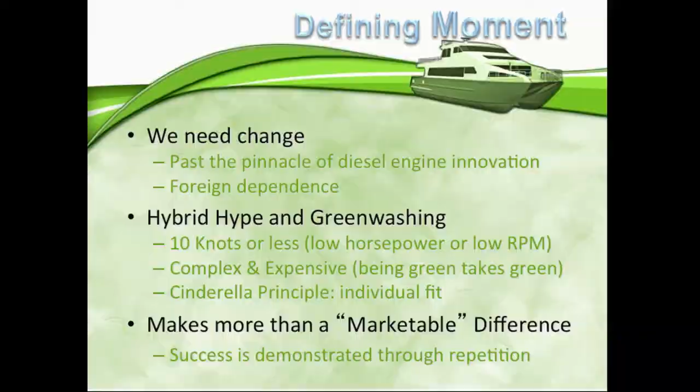And lastly, I want to talk about the marketable difference. If the hybrid technology was so great, we would see everyone doing it. We would certainly see the diesel technology engine manufacturers diving more into this hybrid technology and producing something that's mass marketable.

I don't want to naysay regulations or say anything bad against the EPA, but it seems to some extent that they may have stood in the way of innovation when it comes to green technology. The EPA had come out with a set of emissions criteria that the diesel engine manufacturers had to meet on a rolling tier basis. It started with Tier 1 and we're now at Tier 4. And the engine manufacturers, their R&D efforts were constantly devoted just to meeting the next tier. I think their nose was down and it was hard for them to see forward just because they needed to hit the deadline to keep their product moving out the door.

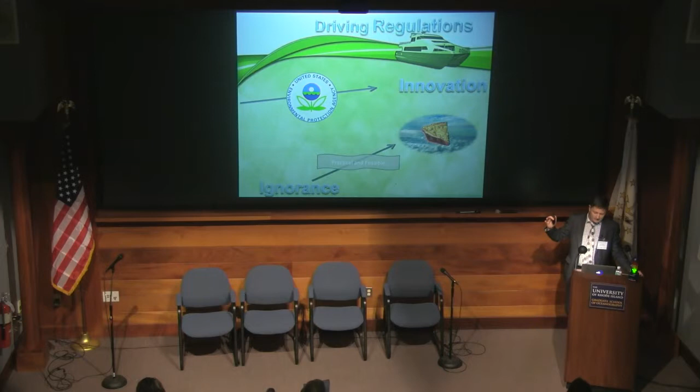It would have been much better, in my opinion, for the EPA to say, let's look to the future and say, by this date, engine manufacturers, we want you to be at this level of emissions. We don't care how you do it, just have at it. And their R&D teams could have taken a more proactive approach and really developed technology to be further along. We might have LNG that's more available throughout the low horsepower range as well. And so we are now at Tier 4, and it's the end of the regulations, and maybe now the R&D teams will be able to develop some more hybrid technology that's useful for the mass market.

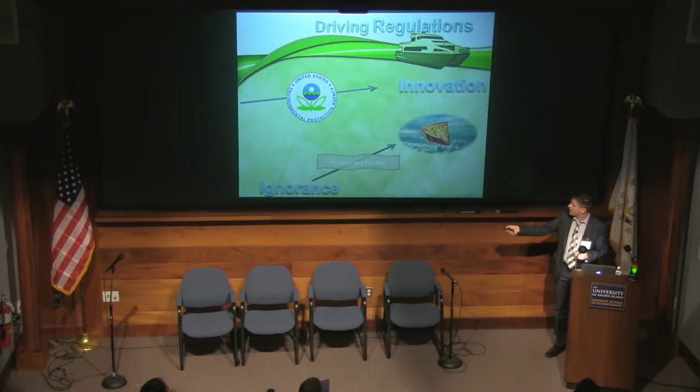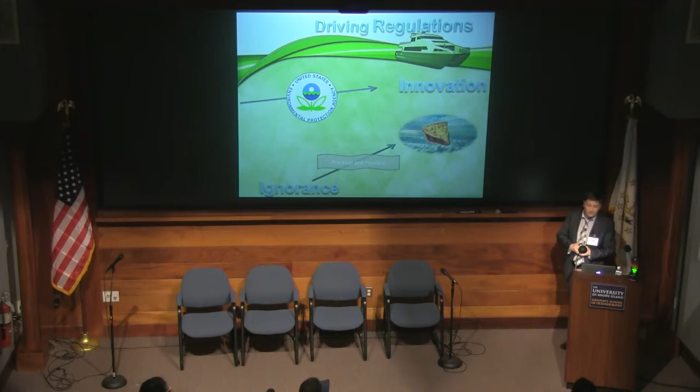And I like to say I like to live in this gray area here. I don't want to be in ignorance or pie in the sky when it comes to hybrid technology and regulations. I think we need to be somewhere right in the middle, somewhere where we can live and breathe and that is affordable and available.

So why do we want green technology on our boats? There's a variety of reasons. Typically, the bottom line, I just killed it, sorry. Typically, the bottom line is not one that we see people embracing green technology for. It is not a cost savings benefit right now. It's usually applying to appeasing various stakeholders.

When it comes to putting green technology on a boat, there are a variety of factors that need to be considered. What green technology is available, what infrastructure requirements are going to be required, be it fuel source or shore power requirements. What do the regulations say? How safe is it going to be? Am I still going to be able to accommodate my mission on board my research vessel? There's space and weight requirements that need to be evaluated. How much fuel am I going to burn? And what is the net savings am I going to experience with emissions? And all of this is a lot to balance.

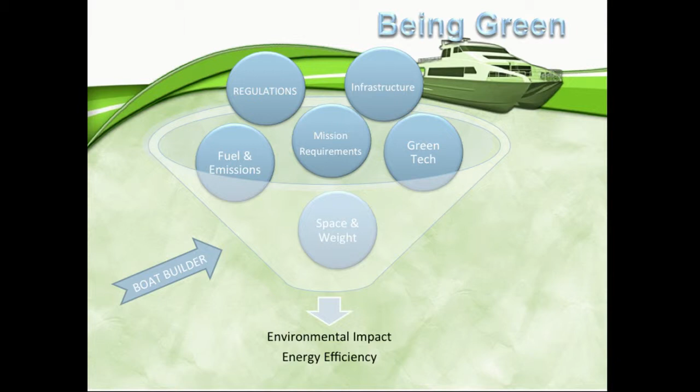It unfortunately ends up being the boat builder's responsibility to pull it all together. And it's a challenge. We'd like to blame the naval architects, but it's really the boat builders in the end who are left holding the bag to put it all together. And it's not easy to do.

So when it comes to considering all these variables, the first thing we want to talk about is regulations and safety. Right now, there's not a lot of regulations out there when it comes to boat building in terms of incorporating green or hybrid technology. Typically, all of the research vessels that we build, they're going to universities or to NOAA or even Army Corps of Engineers, and we'll still follow U.S. Coast Guard standards. It's not a requirement for them to be inspected, but it's good boat building practices. And we'll use the Subchapter T standard for those regulations.

And the thing without having a set guideline with these regulations is we as a boat builder or naval architect have to apply to the Coast Guard for consideration of installing this green technology on a case-by-case basis. Right now, the Coast Guard doesn't have any guidance as to how they're going to consider the installation of lithium-ion batteries. They're very concerned with potential fire hazards, weight issues, wiring runs, etc. Yet they put the onus on the naval architects and the boat builders to come up with a safe plan. And they will review it and approve it, but the onus is on us.

Same with LNG and hydrogen. Right now there's various applications out there that the Coast Guard is looking at, but no standards have been set to date.

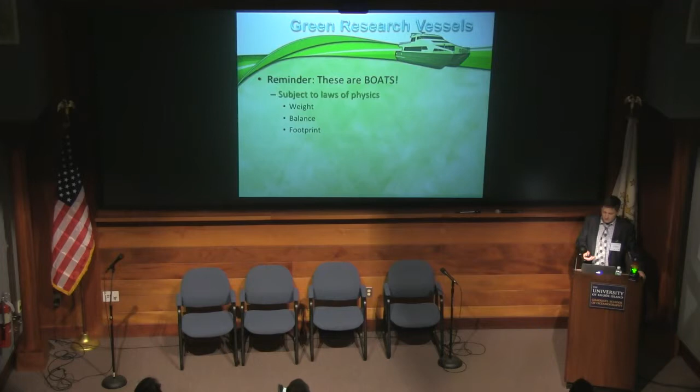I talked a little bit about the infrastructure requirements. We'll get into this a little bit more in my presentation in terms of the fuel, specifically LNG and hydrogen. Great potential for those fuels, but sourcing them and the infrastructure requirements are very high still. And same with shore power. If you want to be all electric, just bringing electricity to a dock may sound simple, but it presents a variety of challenges. Water and electricity are not friends.

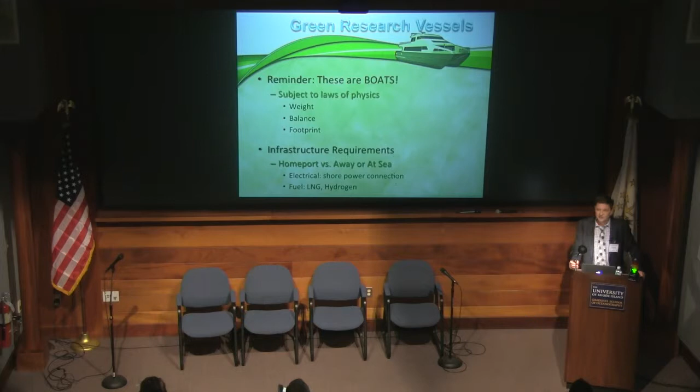Lastly, when it comes to installing hybrid technology, you really want to set specific goals as to what your target is that you want to meet. Be it reducing emissions, reducing fuel consumption, switching to a different fuel type. You can't do it all, and say that you have a completely 100% green vessel. There's going to be some trade-offs along the way. If you have to add additional systems on board, those systems are consuming energy, so your net gain in terms of being green is probably offset.

So I want to get into some of these available green technologies, talk about what is possible, what these eco-pioneers have done. Potentially these are still one-offs. We're seeing more and more of these applications being repeated, and I kind of use the rule of three. Once you see three of these installations, then this technology starts to trend, but most of these guys are still what I would call eco-pioneers.

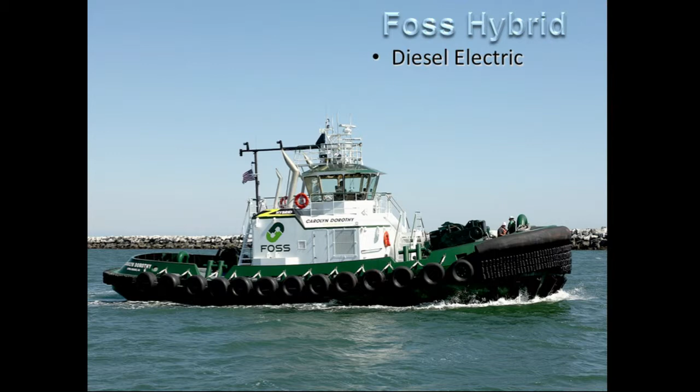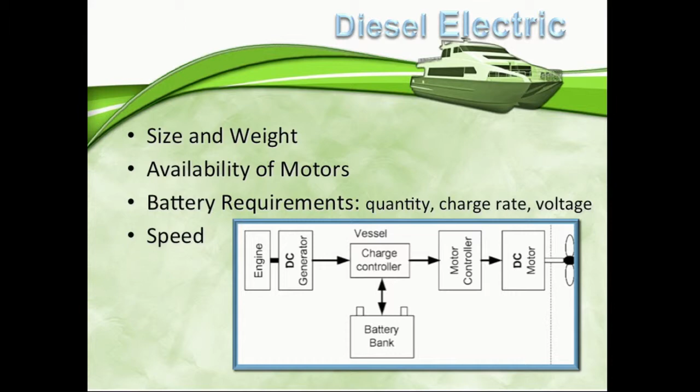So we've seen Foss come out with their hybrid system. I believe this has already been talked about, so I won't go into too much detail, but you're looking at a conventional diesel engine that's supplemented with an electric generator to help drive the propulsion system. A lot of battery requirements and integration, and integration is very complex. So you have a variety of manufacturers supplying things like the generator, the diesel engine, and the batteries. But then who's responsible for integrating it? You have all these different companies, and there ends up being a lot of finger pointing, and a lot of software and technology involved in pulling them all together. And so it ends up being a very expensive and very heavy system, and you can see it pretty much takes the size of a tugboat to put it all together.

And it doesn't always work. The Port of Los Angeles was subject to what I call peer pressure. They were making their pier green, and they said, well, if we are making our pier green, we need to make our tour boat green. And so they decided to put in a hybrid system in their tour boat. However, they could not get all of those components to work together, and they got so frustrated, they said, heck with it, we're selling the boat. And so I think it's been sold recently, or it might still be available on eBay if you're looking for a new hybrid boat.

LNG, great technology, low emissions potential. However, there's a variety of concerns when it comes to LNG. First of all, the tank size. You're going to have to be operating in an area where you can have frequent refueling capabilities available to you, or have very large tanks on board. Those tanks tend to be very heavy.

We've also seen a lot of reluctance, especially now with oil prices dropping. The focus on LNG has been slowed down, and so the engine manufacturers are not pushing that very much. And it's still a very high horsepower application. So for the masses, if you're talking about vessels that are 150 feet and smaller, LNG technology is really not a viable option today. There's no engines being made in that low horsepower range.

And then policy is still being developed with the Coast Guard. They are looking at it right now, and they have formed a liquefied gas carrier national center of expertise. And so they realize that this is a forthcoming technology, and they do want to be a part of it.

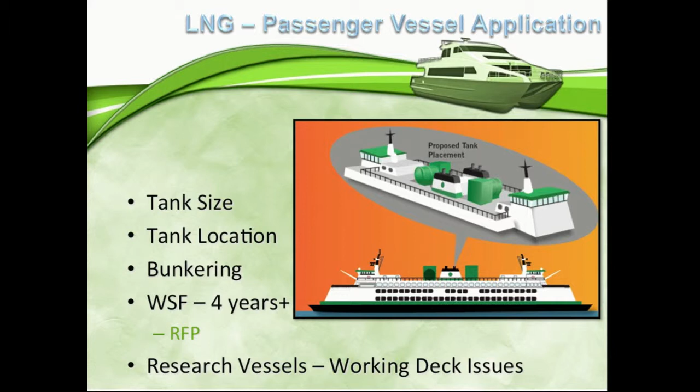Washington State Ferries has had a slow go at it. They've been working on getting their ferries repowered with LNG technology and issued an RFP, but they haven't moved on it yet. So we're still waiting to see what they're going to do and where those tanks are going to ultimately be located, which is up top. And that makes for a boat very unstable when you have weight up top. Also, the bunkering - Harvey Gulf had to actually put in their own LNG bunkering facility to accommodate their requirements.

Hydrogen fuel cell technology, great technology. In concept, hasn't been proven yet. Hornblower gave it a go. They worked with the Coast Guard for several years trying to implement it in New York, and ultimately it's on hold, is what I've been told.

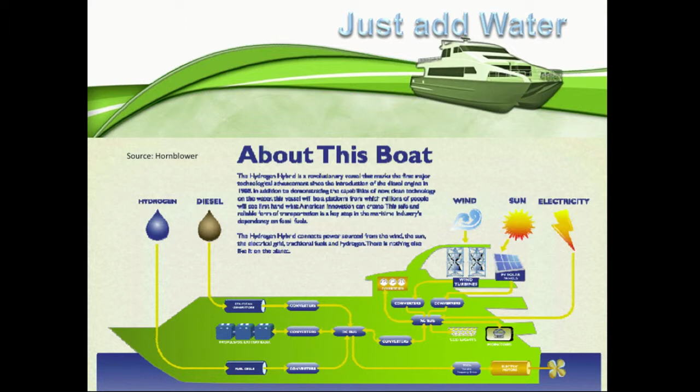It was a challenge. They were actually trying to do a variety of things with wind and solar and hydrogen. And as it was talked about yesterday, hopefully Red and White Fleet with their cooperation or partnership with MARAD and Sandia will be able to bring hydrogen fuel cell technology to a passenger vessel application. So this was one we're watching very closely.

Solar technology still needs to be developed further to be useful for general marine applications. Where do you put all those solar panels? You need a lot of them. How much energy are they going to be able to harness for you to use, and how fast will the vessel be able to go? A lot with the solar sailor application, they're trying to do wind and solar. It's a lot of components, and they can do maybe one thing efficiently, but it's very difficult to do all of these things efficiently.

Here's one that I like. I've never seen this in operation, but it intrigues me. I guess if you live in a windy place, using some kite power might be an interesting form of hybrid technology. Here's one that's a little bit more scalable.

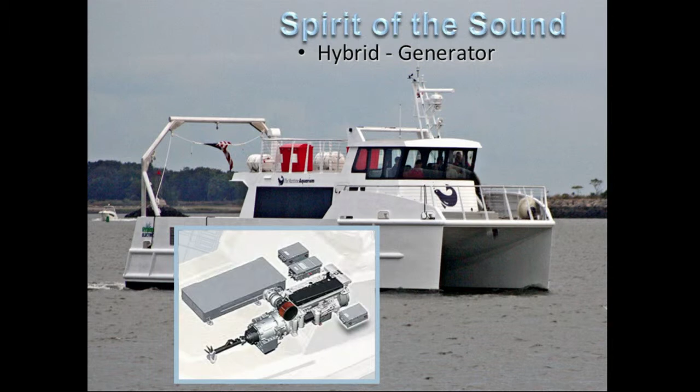And of course, yesterday, I believe it was talked about in detail, so I won't go over it here, but the Spirit of the Sound is great, using the generator hybrid technology. I think this could be a viable option. I'm still listing them in my Eco Pioneer category, but as they build more vessels with this technology, we'll move them over to the trending side.

So what is realistic? Let's talk about some applications for green and hybrid technology, mainly just green technology that I think are viable right now today. Keep in mind that there are many shades of green.

So this first one that I like is a fairly new technology, and this is using a hybrid transmission. This transmission allows you to use smaller sized engines that are supplemented with electric motors. So we can use the smaller sized engines that will burn less fuel and maintain our speed or range with these electric motor inputs. So this particular gearbox has provisions for two electric motors that can complement the diesel engine.

So this is still diesel engine technology. The beauty of this is if you do have a battery source on board, you can actually take your main engines offline and then just drive the transmission directly with the one or two electric inputs. So it's a good way to go.

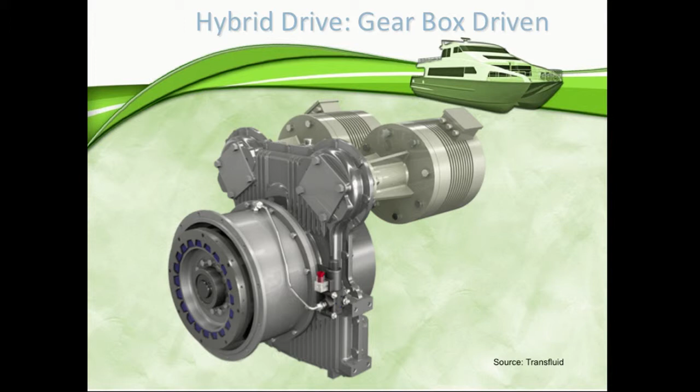Here's another example of how that power take-in is mounted. And here's a complete system. This system is offered by Reintjes. They're a gearbox manufacturer out of Germany. That's another thing to point out - most of the hybrid technology we're seeing these days is all coming from overseas, Europe in particular. Very little of it is developed in America.

So you can see that they have the power take-in on the gearbox. They actually have a supplemental booster on these engines as well. So this is a very complex system, but you can actually scale it down. And that's what makes it appealing - it's modular, and you can install it in a variety of boats.

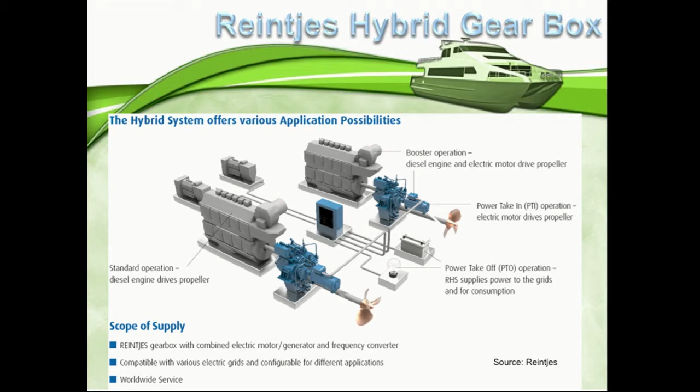This is also another new technology that I really like. This is a motor generator which is actually coupled in line to the engine. So it will act as an alternator when the engine is running and charge some batteries, and then it can decouple from the main engine and just drive the propulsion shaft on its own.

CFD analysis, it's something that's available to everyone. Really work on streamlining your design, minimizing drag so that you can reduce your fuel consumption.

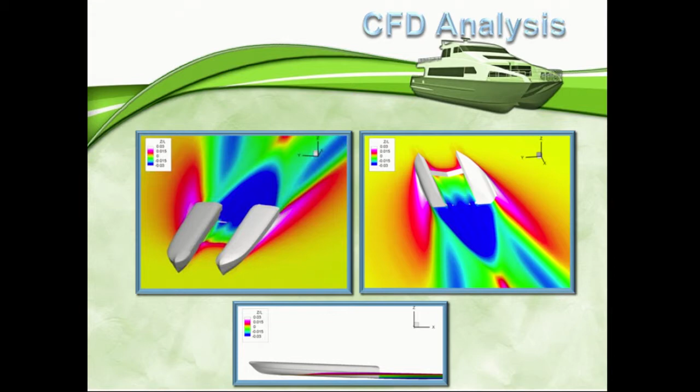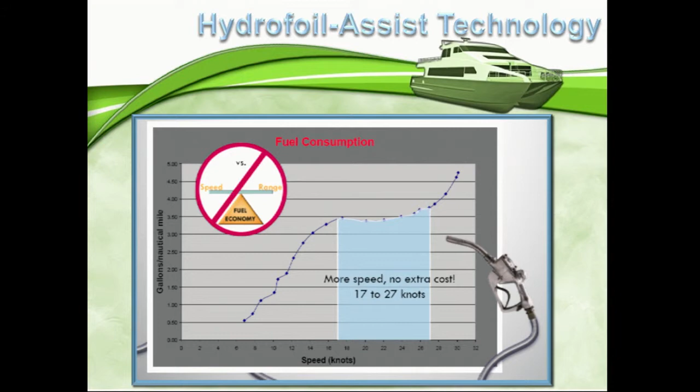I want to just touch briefly on hydrofoil-assisted technology. This is a technology that our company in particular specializes in. We've installed this technology on a variety of research vessels, survey boats. And you'll see here that once the boat gets up on the hydrofoil, the fuel consumption curve is very flat. Typically, we're seeing from 17 to 27 knots.

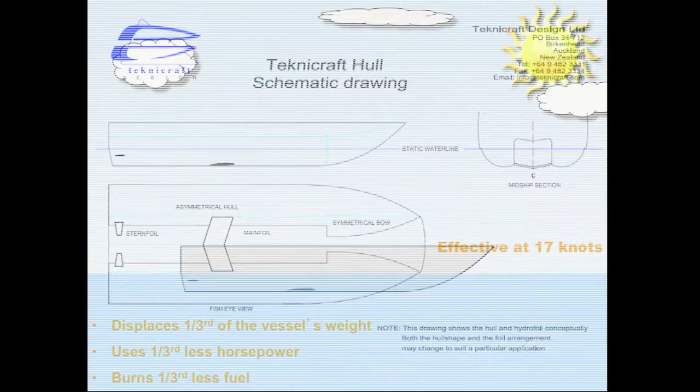And the foil system - I'm just giving you a quick overview. The main foil is mounted above the keel, at and slightly above the keel. I'll give you a quick little demonstration of how that works. This is the water line, and then the foil displaces about a third of the weight of the boat, so it reduces drag. So there's really no penalty for speed, and you're not burning any more fuel.

It's a survey boat with two large engines and two smaller engines. They light up all four engines to run out to the survey site and then take those large engines offline and just do all of their survey work for extended periods of time on the smaller engines.

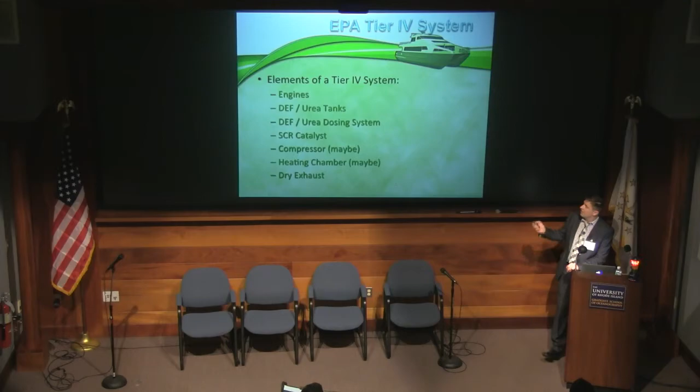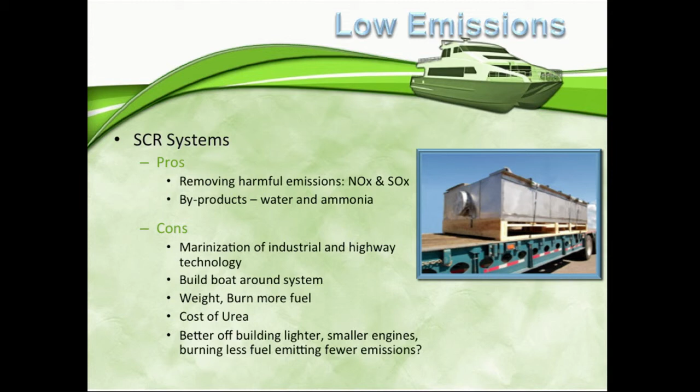Lastly, I just want to hit on some of these green Band-Aids. The Tier IV system that's coming out applies to engines 805 horsepower and above. I'll just wrap it up here. These systems are very large. They are reducing the NOx and the SOx, but they are very heavy and they're not going to fit in all boats. Here's an example of one of those systems.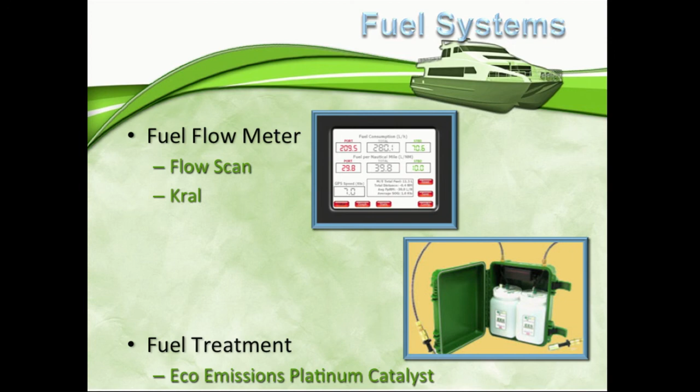You can also use an after-treatment filter, which will heavily reduce the particulate matter, but it won't reduce any of the harmful emissions. And then here's my last slide. It was mentioned before, there is great benefit to having a fuel flow meter on board so you can really monitor your fuel consumption. And you can also reduce your emissions by using a fuel treatment system like a platinum catalyst. You can reduce your emissions by 8 to 10% just with this catalyst system. So thank you so much for allowing me to speak.